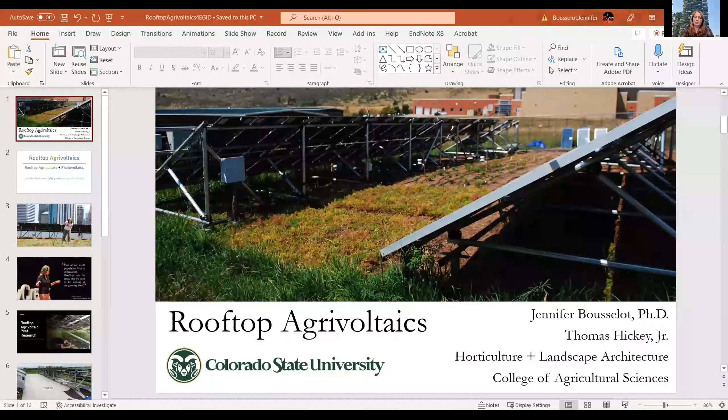So I'm going to share my screen and walk through very briefly, not much data I promise, some of the work we've done on rooftop agrivoltaics. This is one of the locations where we have rooftop agrivoltaic screening work done. If you're not familiar with the term, agrivoltaics is the combination of agriculture and photovoltaics - most of that is applied on the ground.

We are unique in studying rooftop agrivoltaics, although we have interest worldwide since I presented my work through a TEDx Talk. Here's a picture of me from about 15 years ago as I was starting my PhD work. It was about the same time that Manfred Kohler published the first work I'm aware of on biosolar roofs, incorporating solar panels on green roofs.

And we noticed the same exact effect. You can see a solar panel array behind me. At first, I was frustrated with the fact that solar panels were coming up in my research area, but the synergy became absolutely crystal clear in the benefits to the plants and the panels in their co-location. Years later, as I'm faculty and have resources for graduate students, we have started work on agrivoltaics.

Half the world population lives in urban areas. So we need to look at rooftops as spaces to help produce both energy and food.

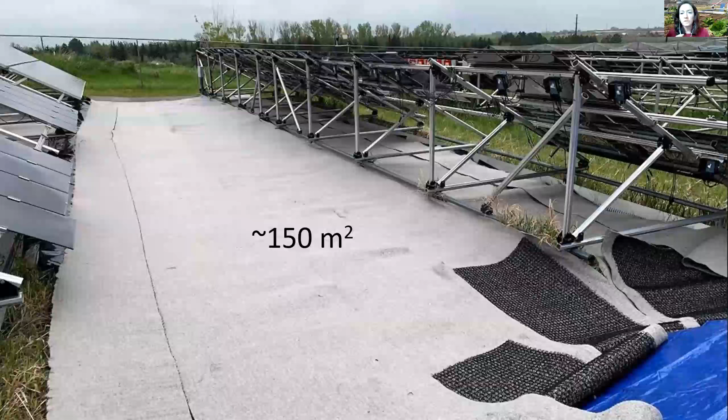versus under solar panels. And so, of course, we're doing this on the ground here. That's because at universities we have very limited resources. But we saw such a stark difference that we decided to expand, because my university is investing in rooftop agrivoltaics, but not soon enough for me to get tenure.

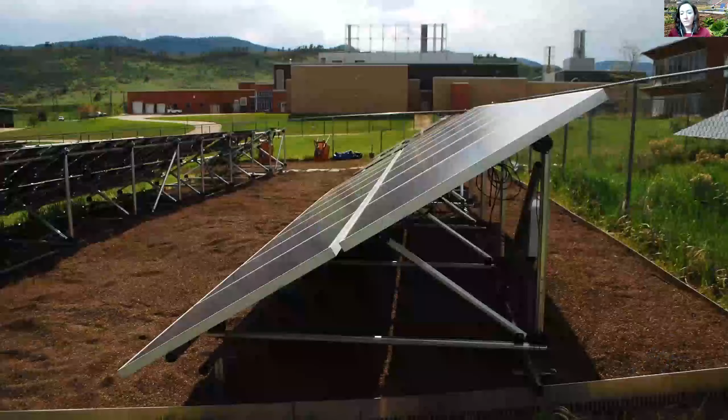So we installed on the ground, under some existing solar panel arrays, about 150 square meters of rooftop agrivoltaic screening area. I hired one of my friends and colleagues who does green roof installations, and we installed a green roof system under some panels. Then we tried a series of studies.

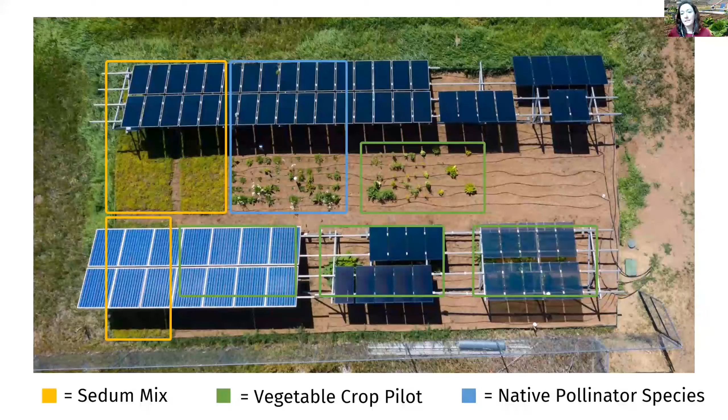We looked, of course, at the traditional sedum tile mix. We also looked at vegetable crops—this is a picture from last growing season, but we're actually starting our series of crop trials this year. We're looking more at leafy greens, since they have such a short shelf life and are so nutrient dense. And then, because one of my emphasis areas is food for pollinators, we also included pollinator species.

One thing I want to mention about all of our studies: if you see the center picture of the lettuce, tomatoes, and peppers, we were just screening crop reaction to the solar panel environment.

But what you'll see is semi-transparent panels—these happen to be cadmium telluride panels that are 40% transparent. This means we end up with an effect that's almost like having a greenhouse over the plants.

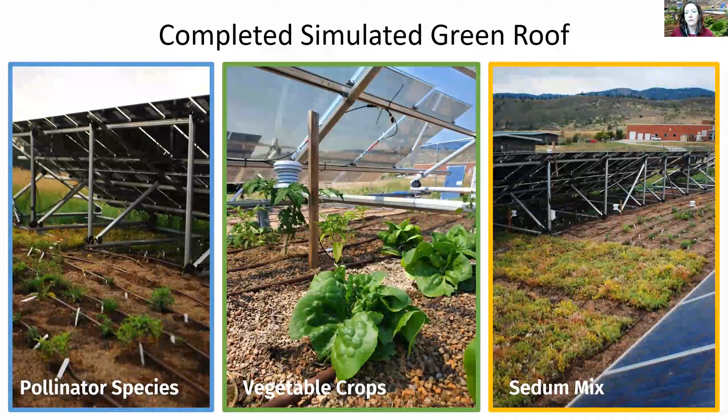I call this, not very technically—because my colleague who does controlled environment agriculture shudders every time I say it—a semi-controlled environment, because we see a modulation in plant stress. It's sort of like sunglasses for our crops. So we're evaluating plant response to the traditional opaque panels, but also under semi-transparent panels as well.

I won't get too much into the data, but notice at the peak—this is a day and a series of temperatures we took at various locations. The key thing to note is that in the middle of the day, when plant stress is at its maximum in a high solar radiation environment like ours, we see a modulation under the solar panels of about 1.3 degrees centigrade, which is a massive reduction in plant stress.

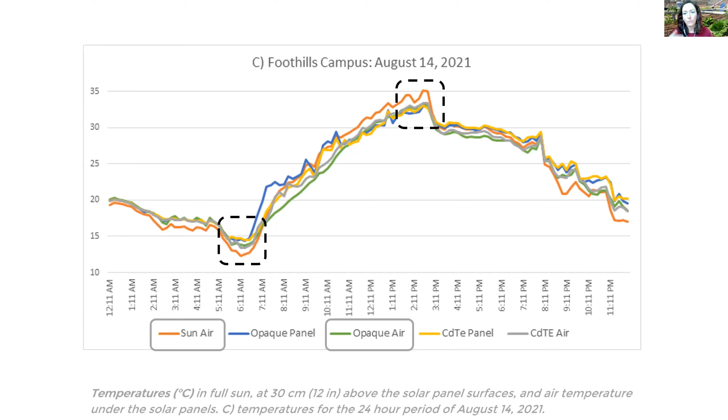It prevents quite a bit of photoinhibition in the plant, so it's more efficient water use and energy use inside of the plants.

We're also really curious about how the solar panels themselves influence the light. Here you see the spectrum of light—plant available radiation is 400 to about 700 nanometers. In full sun, we have a very high light intensity, but we see a modulated, not dark, environment under the semi-transparent solar panels.

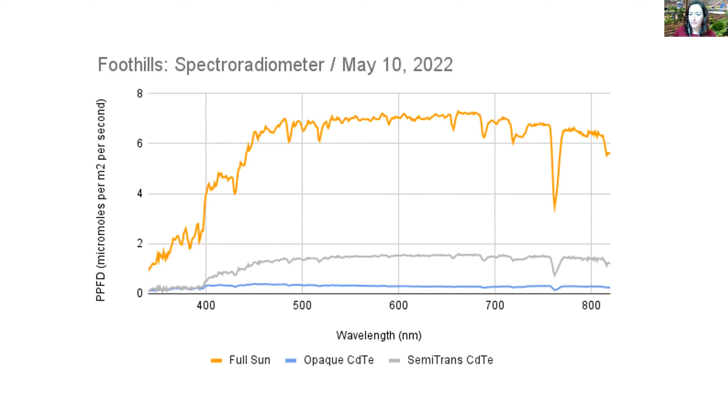My lab is really interested in this. We currently have had to import from China all of our panels that are semi-transparent—they are not UL listed, which is a requirement here to be on the grid for solar panels. But we are working with domestic providers that will have UL listed panels, both cadmium telluride and the traditional silicon panel types.

So as I mentioned, we're expanding an actual green roof on top of a 4-story building in our largest city in Colorado, Denver. My university is housed an hour north of there, but we are putting in 3 buildings of a campus in our major urban area, and the central focus is urban agriculture. I get 2 rooftops to do research on, and one of them is going to be almost entirely rooftop agrivoltaics, so we're going to have almost a doubling of size available to screen crops.

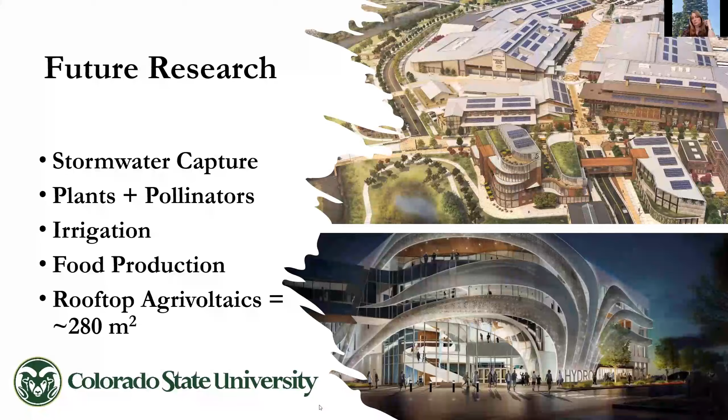So look for a series of publications. We've already got one coming out hopefully later this year, and I have several graduate students working on that effort. So thank you, Luigi, for the opportunity to share our work.

Thank you very much, Jennifer. Very, very interesting. I will already anticipate that I will be in touch after this day, because in session 1, as I told you, we discussed this morning with industry representatives from solar and green infrastructure, which is quite unique as far as I know. It's still something that doesn't happen at the necessary scale. But we have decided that we will organize some technical workshops to put together around the table the 2 industries and understand how to develop synergies and strategies, and how to make the most of these 2 important technologies.

So we'll be in touch, but I will come back to you also with some other questions after this first round of presentations. So I'd like to go now to Ruth. First of all, Ruth, if you can tell us a little bit more about your work and idea, I think it's interesting for our colleagues, speakers, and participants to understand.

And then for the purpose of this discussion, we wanted to ask you more about the European Commission's work on this important concept, the new European Bauhaus movement, in particular its greening of buildings dimension. We, as World Green Infrastructure Network, have also been mobilized by this movement. We see that there is a lot of interest from a lot of stakeholders, and there are some events coming up in the next weeks.

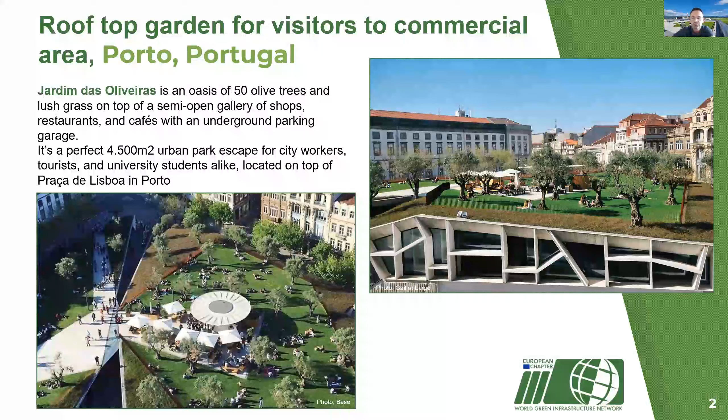So you can see how the green on top of the building is becoming sort of a living square where people can meet, enjoy, sit, have a barbecue even, or a small sitting together discussing how this can improve the entire area itself. If you can imagine, if this were gray, people would just walk by - they would not stop. This is where we see why the green in dense urban areas is so important.

If I go further, this is a project we did actually - I'm based in Slovenia, so we are doing a lot of small, mid-sized and bigger projects in Slovenia.

This was another project we did with the people. It's a school, and there was a competition driven by a local NGO to do a roof on the school. The best idea got the financing for a green roof. This was the idea of students at a school in the city of Kranj in Slovenia, where they did a green roof but also a rooftop garden growing different types of plants, teaching proper horticulture. They also learn how the green roof can do stormwater management, because implementation of the roof isn't just about aesthetics, it's also about functionality.

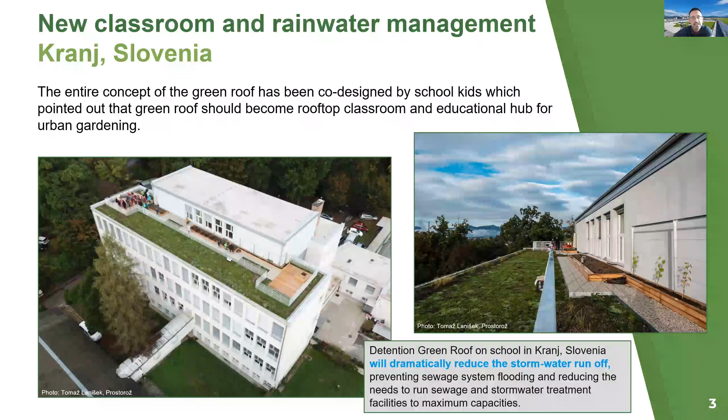This one has a special system which on one side is detaining a lot of the rainwater, and also a system which is retaining a lot. So we retain a lot and we also detain, so that massive storms don't put too much pressure on the local sewage system, because the majority of the city, the old part, still has a combined sewage system where stormwater and regular house waters are combined in one system. So what we want to do is lower the burden from the rainwater.

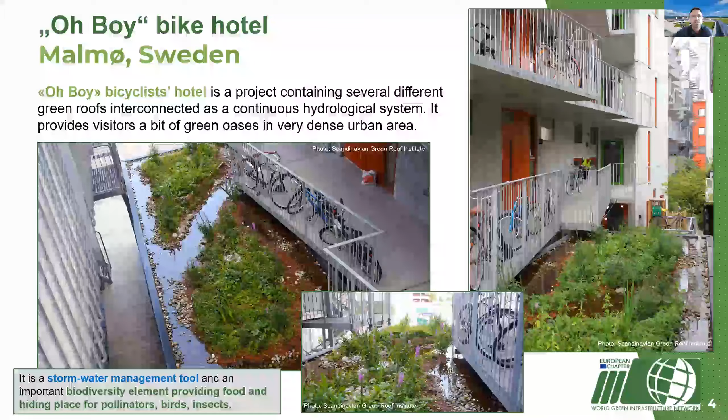This was a project sent to me by colleagues from the Scandinavian Association. This is an example in an extremely dense area in Malmö, Sweden. It's a bike hotel, and they were able to do multi-story green roofs, which on the bottom also has a kind of rain garden. So almost the majority of the rainwater is actually captured in the several layers of the green roofs of this hotel, and only a small amount passes further into the sewage system. At the same time, it makes the hotel much more appealing for residents and bikers, bringing a lot of life, pollinators, birds, and also small animals, I was told.

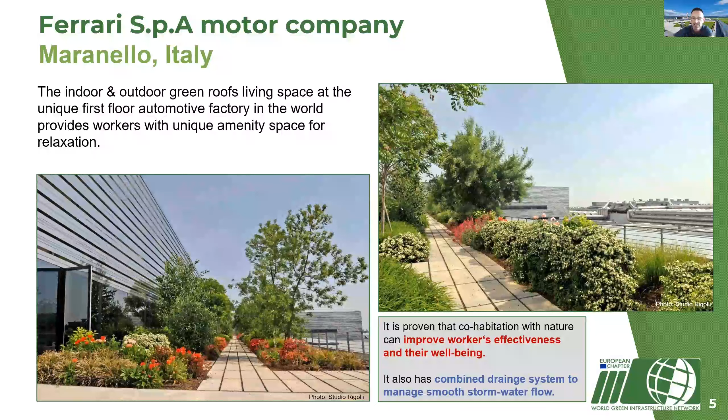Another nice project was shared with me by the Italian association, Studio Rigoli. This is the Ferrari factory plant in Maranello, and they have a green roof inside, but also on the roof and around the area of the entire factory. It's an amenity space for relaxation where people can go and relax in a nice environment. It has a positive benefit, I've been told, not just for well-being, but also because people no longer need to go out of the factory looking for green spaces. So they stay there, enjoy, talk, and have a much better social life in the company.

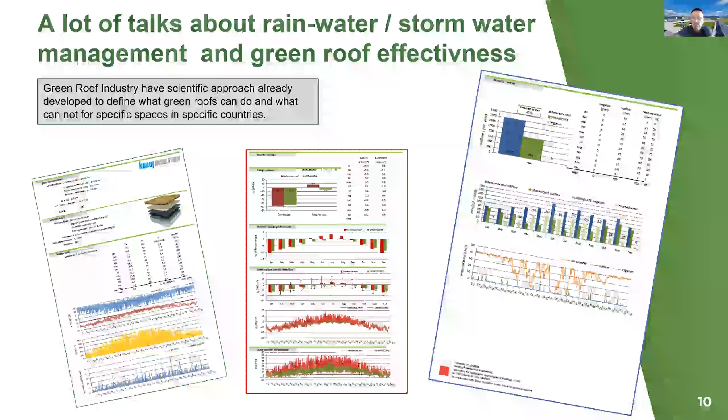After 5 years of in-depth research and compiling data, we are now able to model the performance of green roofs for basically any type of roof in the world. We are able to calculate the energy efficiency of the roof under different settings, we are able to do heat island effect calculations, and we are pretty confident, by statistical means more than 95% confident, that we can tell what the storm water retention of the roof will be in different cities.

Let me show an example from the capital, Ljubljana, where I live, which is, by the way, the wettest EU capital by amount of water, but it does not have a lot of rainy days. It has some, but much less than, for example, Brussels, and probably Mechelen as well. So it has half as many rainy days, but more than 150% more rain.

So we are able to calculate how much water we could retain in Ljubljana with just one design of the roof — it's 45%. Of course, with different settings, you could go up to 60%, but this is just an example.

Based on 20 years of historical data, we are able to model what will happen with the rain on the roof — how much rain there will be per month, how much will be runoff. And we are able to model when the major runoffs will happen, meaning we know exactly when the green roof will be fully saturated and when it will be dry.

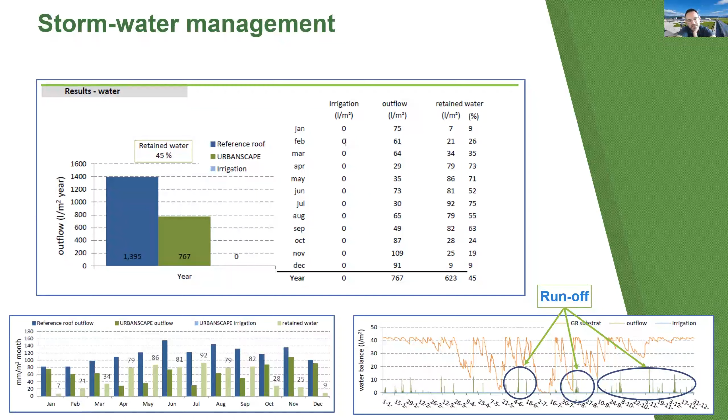So obviously, when it's fully saturated, the runoff happens. A good example is the storm from last year in Ljubljana, where we had 120 liters of water per square meter in 1 hour, which is 12 centimeters, or 5 inches in an hour. So it's a massive rain. And even with our huge sewage system, built for big storms, it was not coping. A lot of areas in Ljubljana were underwater, and this is happening maybe not every year, but more and more.

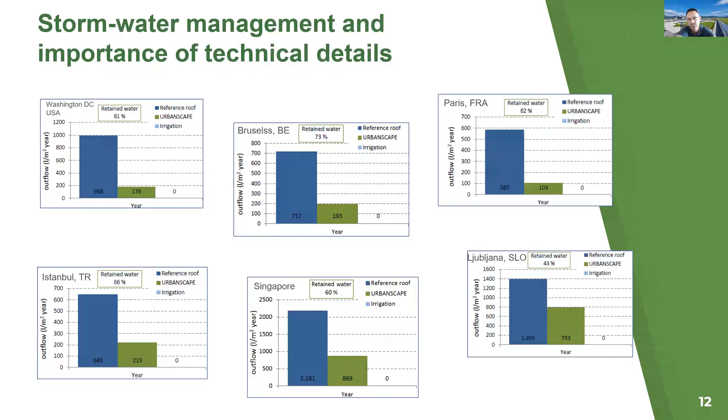Just to show different examples, the same type of green roof that we modeled for Ljubljana, if you model it for Paris, Brussels, Singapore, Istanbul, you can see the retention is much different because the climate is different. So that's why it's important. Green roofs are a superb tool to handle stormwater, to do a lot of different things, but you need to do it knowing the specific climate conditions in the specific area.

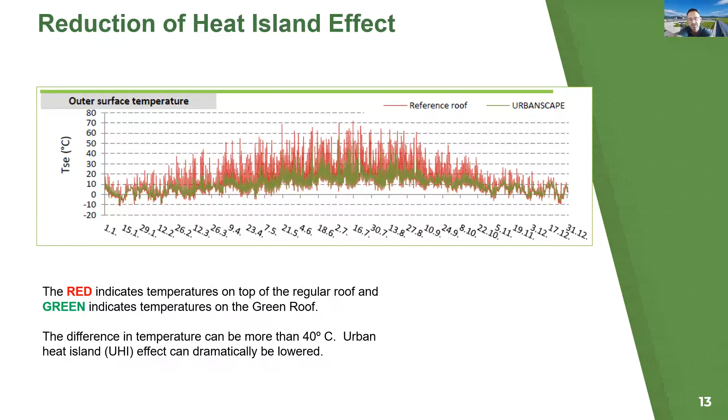So yeah, that much I would say from my side. If you want some more details, feel free to send me an email, and I can give you a bit more in depth on our research or the things we do.

Thanks. Wow, thank you very much. Thanks a lot, Jure. Very interesting presentation, and very interesting this monitoring, these reports that you have presented. So Jure, can we model any city in Europe or in the world?

Yeah, we can model basically any city in Europe because we are extending the study. Partly supported by Eureka, we are now doing similar studies in the Netherlands. We are also doing a study already in Australia. We are collaborating with Green Roof Diagnostics, which Anna was speaking about in the morning. We are doing similar research in, I don't know how many places, but I know we do it in Virginia for sure. So we are modeling the same type of testing in different parts of the world, and we've been doing this consistently since 2013.